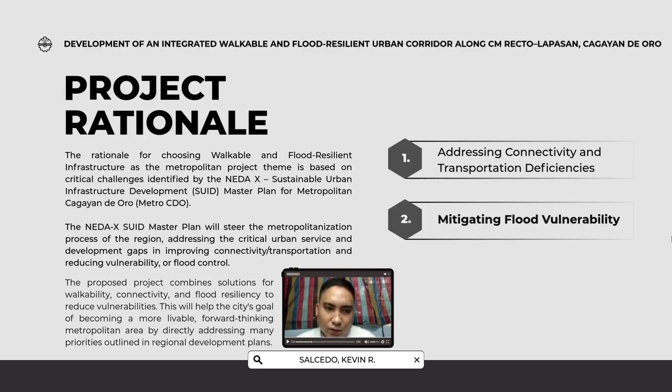These project rationales address connectivity and transportation deficiencies and mitigate flood vulnerability. This proposed project aims to enhance walkability, connectivity, and flood resiliency, ultimately reducing vulnerabilities. This initiative aligns with the city's objective of becoming a more livable and progressive metropolitan area by addressing key priorities from regional development plans.

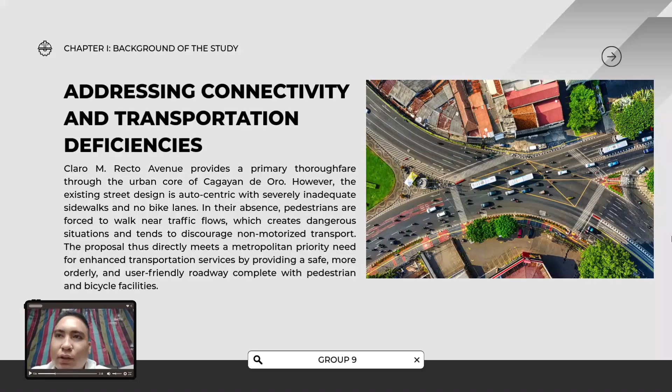Addressing connectivity and transportation deficiencies: Claro M. Recto Avenue, Cagayan de Oro's main road, lacks bike lanes and has poor sidewalks, forcing pedestrians to walk near traffic and discouraging non-motorized transportation. The project aims to enhance safety and organization by providing dedicated facilities for bicycles and pedestrians, addressing the city's urgent need for improved transportation services.

Mitigating flood vulnerability: the project site in Cagayan de Oro is highly flood-prone during heavy rainfall. The SUID paper advocates for addressing this vulnerability through design. Proposed solutions include the installation of bioswales and planting strips, which aim to enhance green infrastructure, manage stormwater runoff, filter pollutants, and mitigate localized flooding.

Related studies and literature highlight numerous documented urban issues specific to Cagayan de Oro City, such as chronic flooding vulnerability and deficient urban walkability and traffic safety. These issues highlight the necessity for integrated planning to align projects with the Philippine Development Plan (PDP) 2023 to 2028, focusing on creating disaster-resilient and sustainable communities in response to safety risks from inadequate connectivity and climate-induced flooding.

Chronic flood vulnerability in Cagayan de Oro City emphasizes the city's substantial risk to climate change and environmental threats, particularly after Typhoon Sendong in 2011. Approximately 74,399 individuals are at risk of flooding across 59 barangays, prompting the government's Flood Risk Management Project (FRIMP) to enhance flood mitigation through flood walls, improved river channels, and early warning systems.

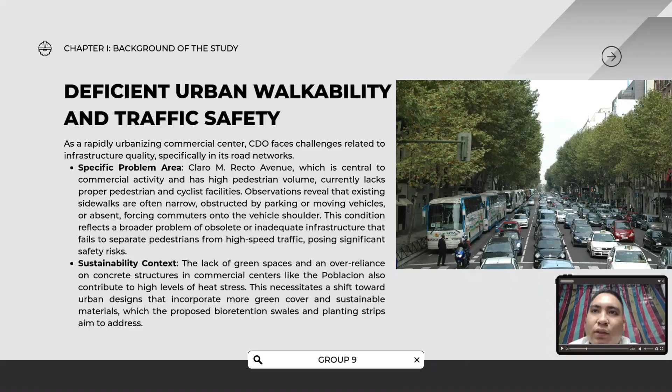Deficient urban walkability and traffic safety are critical concerns, especially on Claro M. Recto Avenue, where missing infrastructure creates dangerous conditions for pedestrians and cyclists. The city's heavy reliance on concrete and lack of green spaces exacerbate heat stress, indicating a need for more sustainable urban design that incorporates greenery and bioretention systems.

For Chapter 2, we'll tackle the synthesis. The first part is the SWOT analysis. For the strengths: strategic location, commercial hub, addressing flood vulnerability, improving connectivity, and potential for enhanced public spaces.

In terms of strategic location, CM Recto Lapasan is a high traffic area, making improvements highly visible and impactful. In terms of commercial hub, strengthening infrastructure supports local businesses and attracts new investments in the area. In terms of addressing flood vulnerability, Lapasan is known to be prone to flooding, making flood resilience measures crucial.

Most of us students and teachers experience this — even with just light rain, it floods right away, especially near USTP. Enhancing pedestrian and transportation infrastructure can better connect Lapasan with other parts of the city. Lastly, the creation of attractive and functional public spaces can significantly improve the overall quality.

For its opportunities: green infrastructure solutions, such as bioswales and permeable pavements, can significantly enhance flood resilience and improve the urban environment.

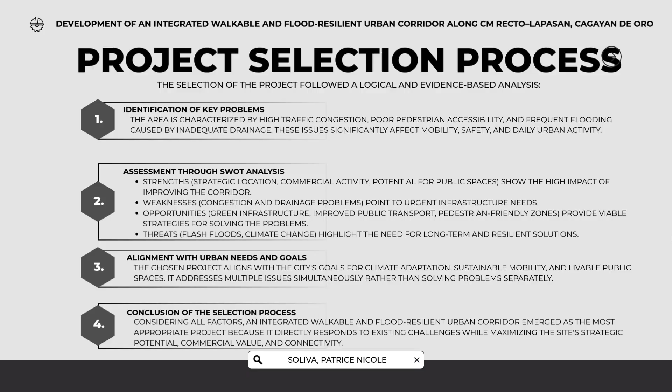The SWOT findings highlighted the corridor's strategic location and commercial importance as strengths, existing drainage and traffic issues as weaknesses, opportunities for green and pedestrian-focused development, and threats from flash floods and climate change. Given these factors, an integrated approach addressing both mobility and flood resilience was identified as the most effective solution. This led to the choice of a holistic corridor development project that maximizes the site's potential while mitigating current and future urban challenges.

For project filtering, filter 1 and 2. For filter 1: strategic merit and synergic fit.

The proposed integrated walkable and flood-resilient urban corridor along CM Recto Lapasan aligns strongly with the strategic objectives outlined in SUID for Metropolitan Cagayan de Oro. It directly addresses critical urban challenges such as traffic congestion, limited walkability, and recurring flooding, which are projected to intensify with metropolitan expansion, by improving mobility, enhancing climate resilience, and upgrading public spaces.

Filter 2: compliance with relevant criteria. The project meets more than 3 of the required criteria.

The first one is relevance. The proposed development responds to key issues in CM Recto-Lapasan, including heavy congestion, unsafe pedestrian conditions, inadequate drainage, and the lack of climate-adaptive open spaces. Its relevance is high as it addresses priority urban concerns affecting mobility, safety, and quality of life.

Claro M. Recto Avenue is one of Cagayan de Oro's busiest roads, but today it faces challenges that affect safety, comfort, and mobility. This project envisions transforming the avenue into a safer and more people-friendly space. Proper sidewalks will be added, giving pedestrians a secure place to walk without risk.

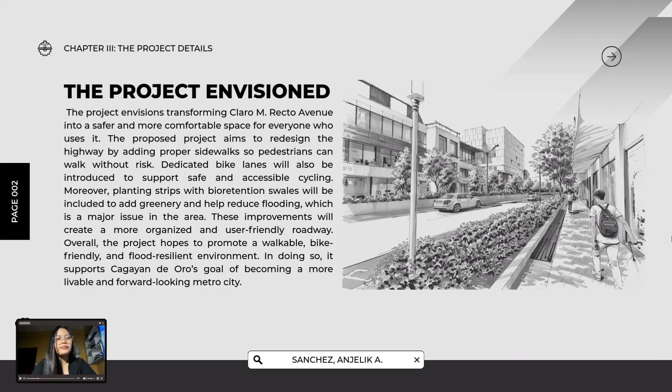Dedicated bike lanes will create a protected, accessible route for cyclists. Green planting strips with bioretention swales will bring more trees and help reduce flooding, one of the area's major concerns. With these improvements, the avenue becomes more organized, more comfortable, and easier for everyone to use. Ultimately, this project supports Cagayan de Oro's vision of becoming a walkable, bike-friendly, and flood-resilient city, a metro that's ready for the future.

Claro M. Recto Avenue is one of Cagayan de Oro City's main roads. It runs right alongside the project site and serves as a major corridor filled with pedestrian activity, commercial areas, and heavy traffic. Despite its importance, the avenue lacks proper sidewalks and bike lanes. People are often forced to walk close to moving vehicles, creating safety risks for both pedestrians and cyclists. The area is also prone to flooding during periods of heavy rain, disrupting mobility and putting the community at risk.

Because of these challenges, the site presents a clear opportunity for improvement—a chance to create a safer, more organized, and environmentally friendly space for everyone, especially pedestrians and cyclists.

This shows a clear lack of proper pedestrian infrastructure and safety.

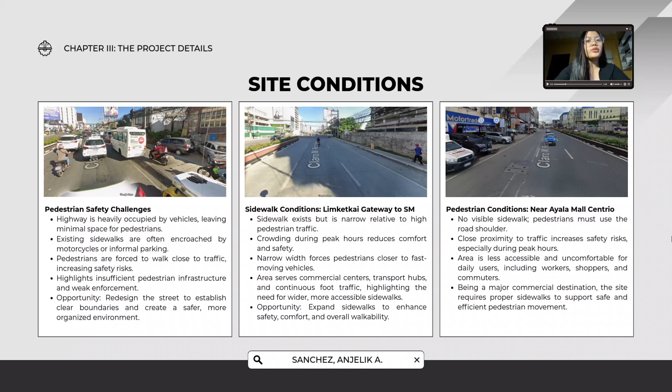For the site conditions, as observed in the first picture shown, the highway is heavily occupied by vehicles, leaving little space for pedestrians. Existing sidewalks are often used by motorcycles as informal parking, which forces people to walk close to traffic. This shows a clear lack of proper pedestrian infrastructure and safety.

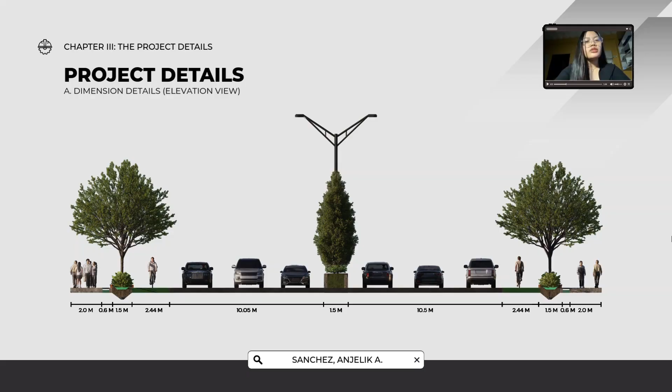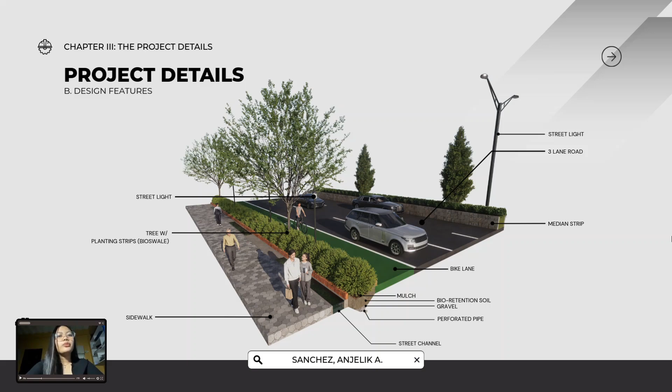Now let me present the design features of our proposed redesigned highway. First is the street light for sidewalks. This provides illumination along sidewalks to keep pedestrians safe and visible at night.

Next is the street light for the main road. This enhances driver visibility and reduces accidents by lighting the roadway and highlighting lanes, obstacles, cyclists, and pedestrians. Now we have the 3-lane road, a main roadway with 3 traffic lanes that supports smooth vehicle flow and provides enough width for safe movement and emergency access.

Next, we have the median strip. This separates opposing traffic lanes to prevent collisions and reduce headlight glare, while offering space for plants or barriers. Then we have the bike lane, a dedicated lane that ensures safe, organized travel for cyclists and promotes sustainable transportation.

And of course, we have the sidewalk. This is a protected pedestrian path separated from vehicles to improve walkability and safety. We also have the planting strips or bioswale, a green area that captures and filters stormwater while adding greenery, improving air quality, and supporting biodiversity.

We also have features for the bioretention swale. First is mulch, a soil covering that helps retain moisture, control temperature, and suppress weeds in planting areas. Then we have bioretention soil, a specialized soil that filters rainwater and reduces runoff, preventing pollutants from entering drainage systems. We also have gravel, which supports drainage and prevents erosion beneath the bioretention soil.

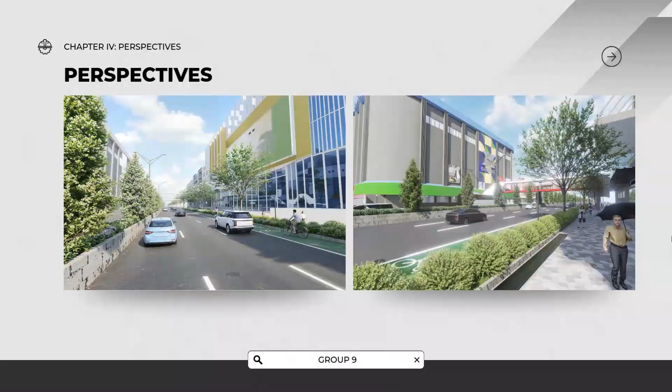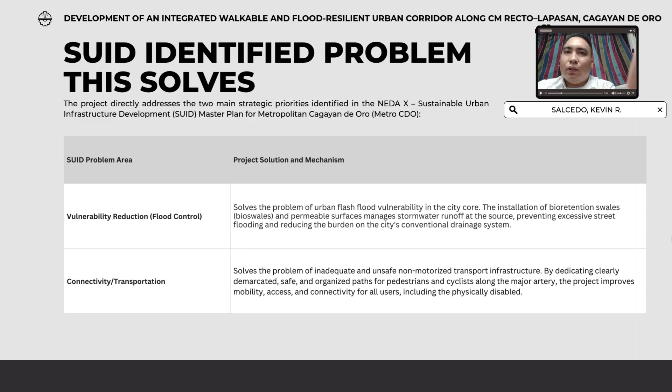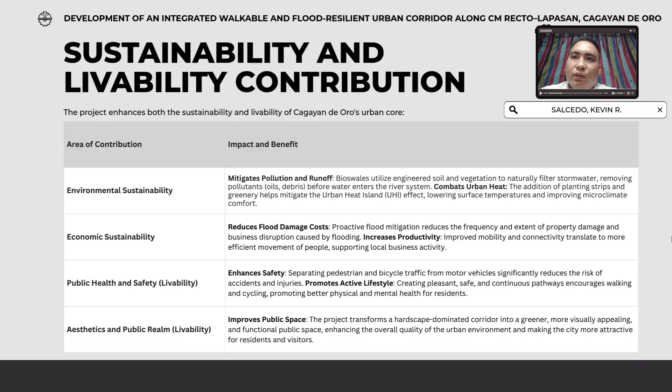This table explains the key benefits the project brings to the city, from cleaner air and reduced flooding to safer streets, healthier movement, and more welcoming public areas. This overview shows how the project supports a greener, safer, and more people-friendly urban core by addressing environmental needs, economic resilience, public health, and overall city comfort.